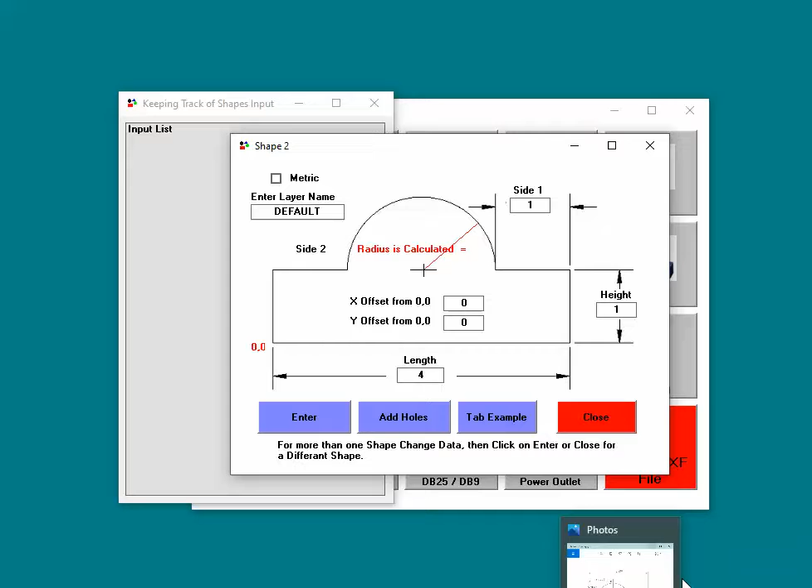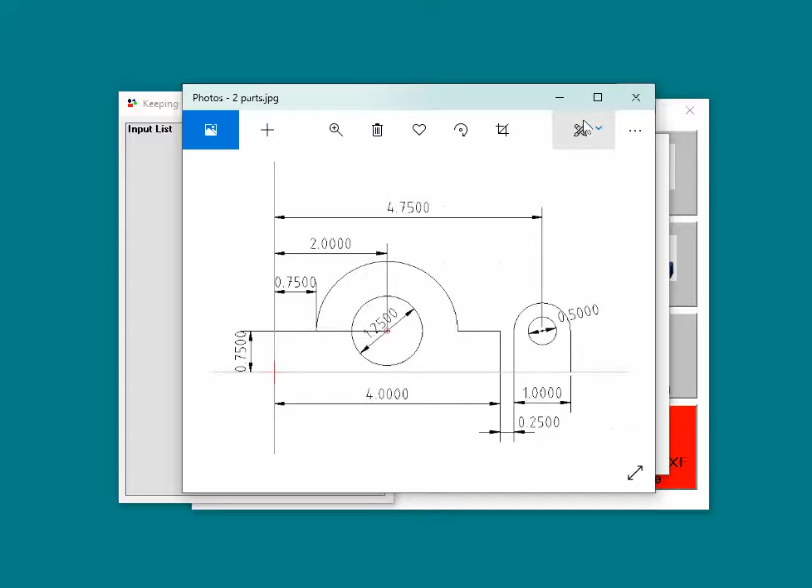I'm going to delete my part.dxf file. Okay, it's deleted. I'll show you this shape here, this is the sketch I made to create these two parts. These could be a pillow block or some kind of support, a bearing, and this is the other end support that maybe is going to get welded. This could be drilled or welded. Anyhow, this is what I'm going to show you. I'm going to minimize this again.

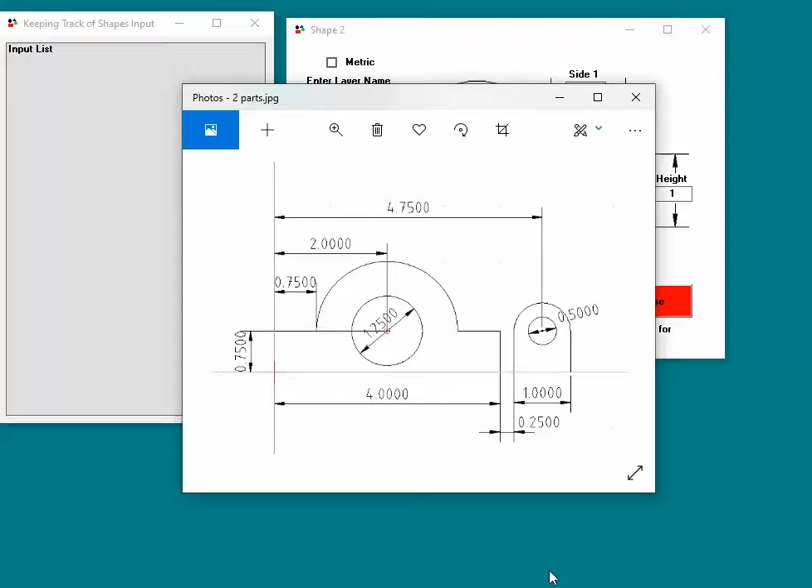Keeping track. Let's see if I can make room here. Alright, so this is the first shape we're going to make. We're going to make this side, what is it? Let me see if I can, should have made the screen bigger.

Alright, it's going to be 4 inches long, which I have here. The center distance is 3/4, so we'll type 0.75. And the side is 750, so we'll give that 0.750.

The offset, there is no offset on this one. The next one will have an offset. Okay, so I think that's it for this one. Let's see.

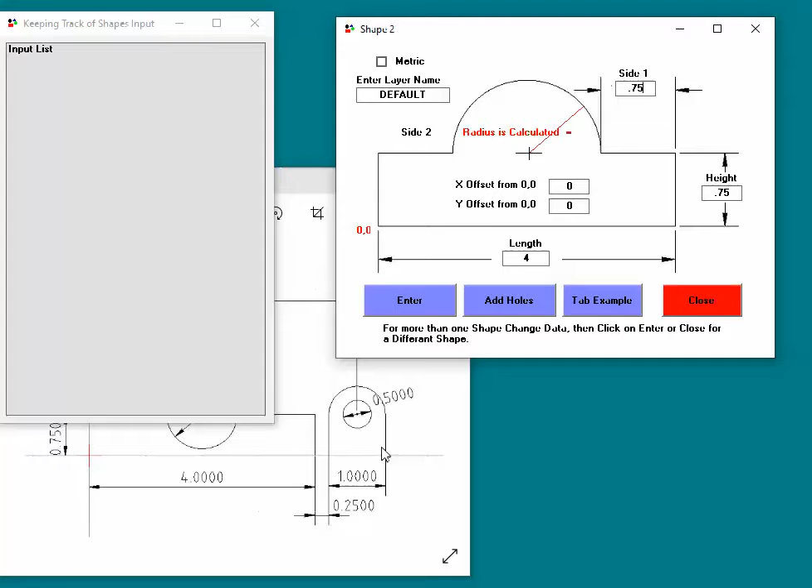Oh, we're gonna add a 1.25 inch hole. Now, the radius is calculated to whatever this distance is here. The difference between these two sides is what the radius is, and it's already calculated. It'll pop up here and tell you.

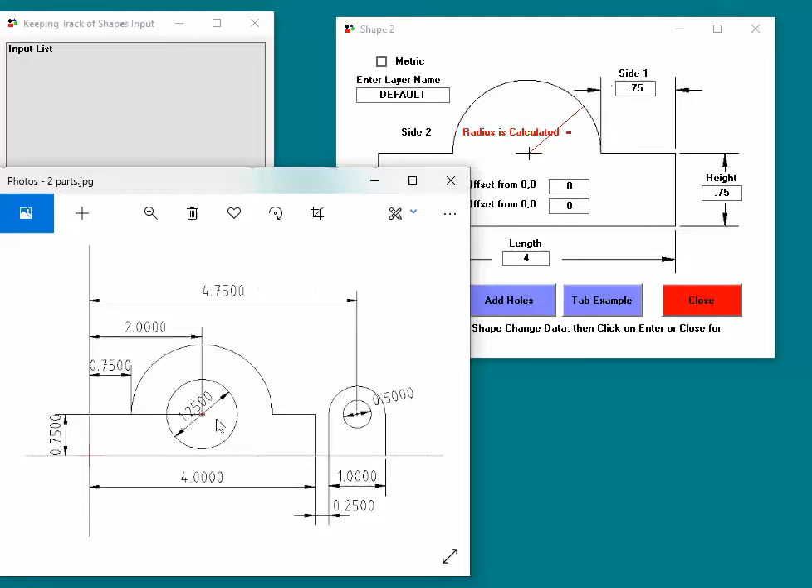So, getting back, let's finish the job here. What we're going to do now, we want to add a hole, and that's a 1.25 inch hole. So let's go back, and it's going to be 2 inches because this is 4, so that's correct.

So we're going to change this to 750, and we're going to change this to 1.25 inches. Center, that's the center distance, and there's the hole size. Enter it. Okay, it's done.

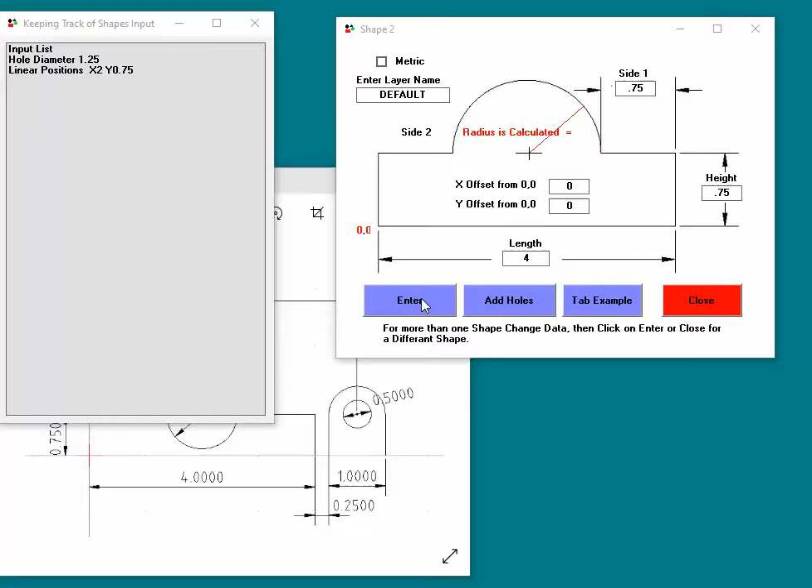Close it. Now we're going to enter this. Enter. That's done. Now we're going to change it to this, this little tab here. This is 0, so the bottom is right there.

Okay, so it's going to be 4 1/4 on the offset. That's 4 plus 250, that's for the cut. You could have made it 1/8 if you want, 4 1/8, or 4 1/2, or whatever.

Okay, and it's going to be 0. The length is going to be 1 inch. And the side is, if you read the pop-up... oh, I don't know, I can't get the pop-up in, but it says there, enter 0 for no sides. So I'm going to enter 0.

Now, a lot of these shapes, you can do the same thing here if you wanted to change the shape. You can also import this into your CAD program and change the shape as well.

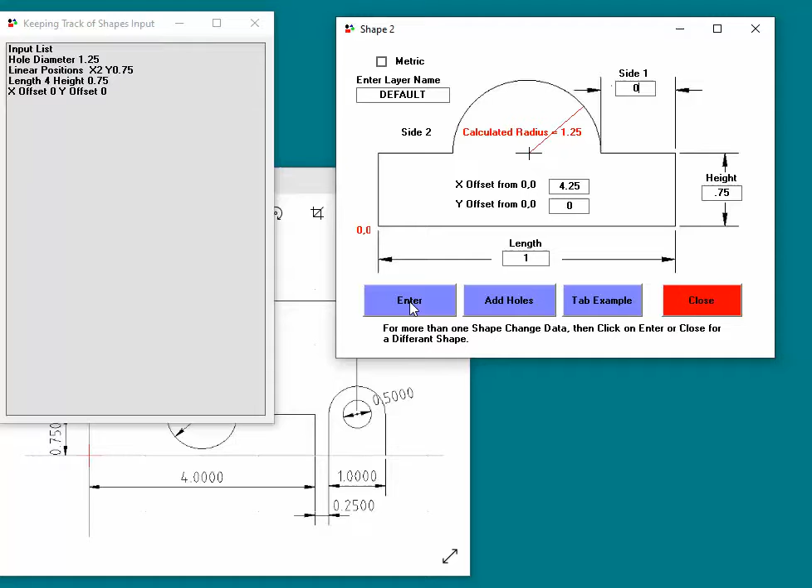Okay, so clicking on, see if we go, we're going to do a hole size. Let's enter it and put the hole in. The hole's a 1/2 inch, so add the hole, going to be a 1/2 inch hole.

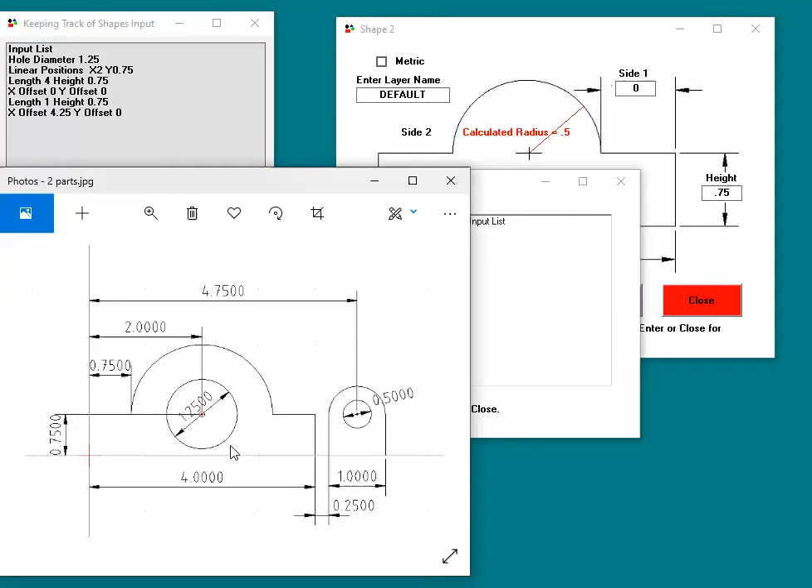And it's going to be 4 1/4 on X. Is that right? Oh, 4 750. Made a mistake. And it's going to be 750.

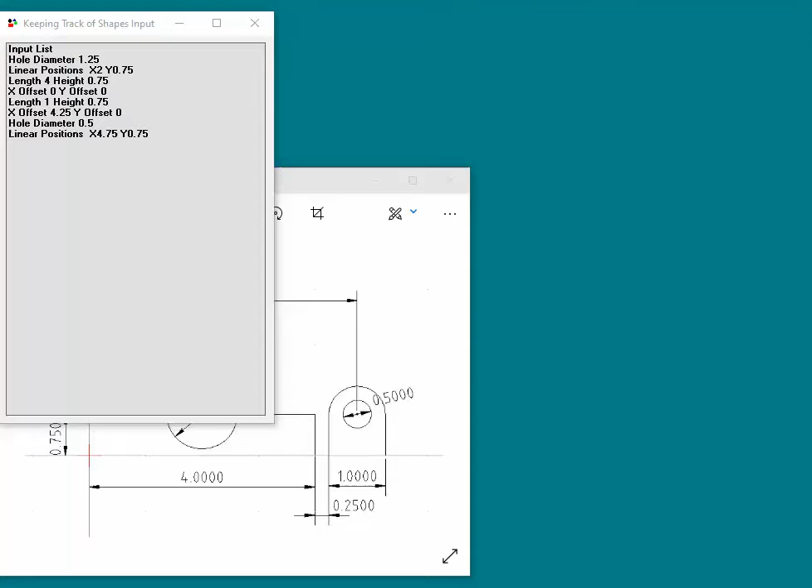So there's the centers, the hole size. Enter. I think we're done. Close it. Create it. It's created.

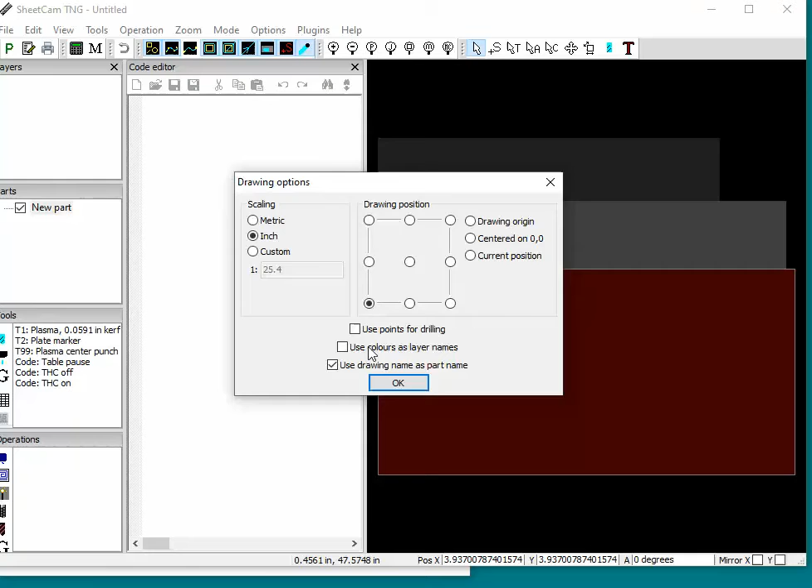I guess we can go to SheetCam, if hopefully I did this right. So let's go to SheetCam. Get it in here. It's called, it's in my DXF, Part DXF. I always use Part DXF for examples, but you could have named it anything you wanted. And it's inch. Oh, there we are. I guess I did it right.

Well guys, there you are. This is what you can do with this program. You can create 2 different parts from one shape. Now, this center could be moved up using the X and Y points if you wanted to. Like if you wanted to move, this is at 3/4, you could move it to 1 inch by changing the X and Y points.